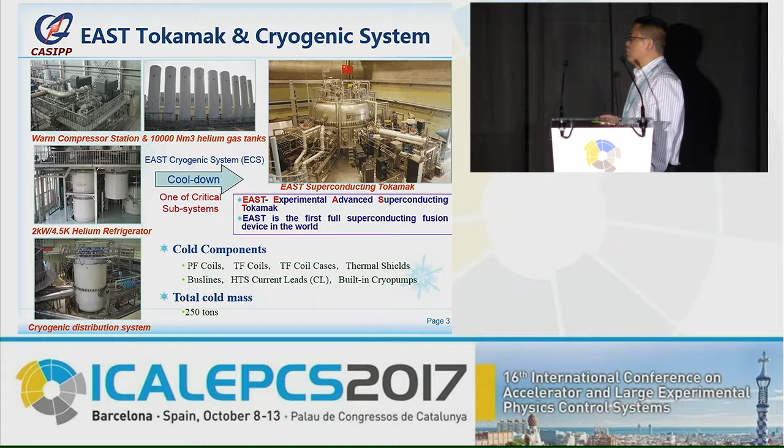Maybe you know, EAST is the Experimental Advanced Superconducting Tokamak. It is the first full superconducting fusion device in the world. So the cryogenic system is one of the critical subsystems. The cryogenics cool down the cold components, including the superconducting magnets and the support system. The total cold mass is 250 tons.

This figure shows the process of the EAST cryogenic system. The first part, the compressor stations. This part, the coldbox. This part, the cryogenic distribution system. The coldbox includes two refrigerator cycles with liquid nitrogen pre-cooling.

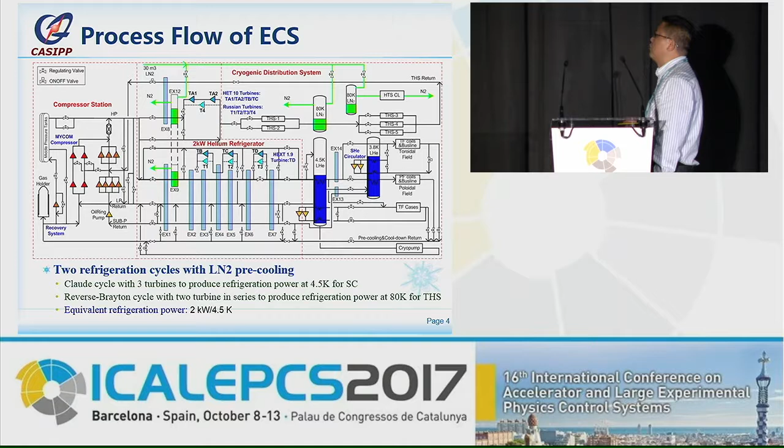The first Claude cycle with three turbines produces refrigerating power at 4.5 Kelvin for the superconducting magnets. The other, the Brayton cycle with two turbines, produces refrigerating power at 80 Kelvin for the thermal shield. The total refrigerating power is about 2 kilowatts at 4.5 Kelvin.

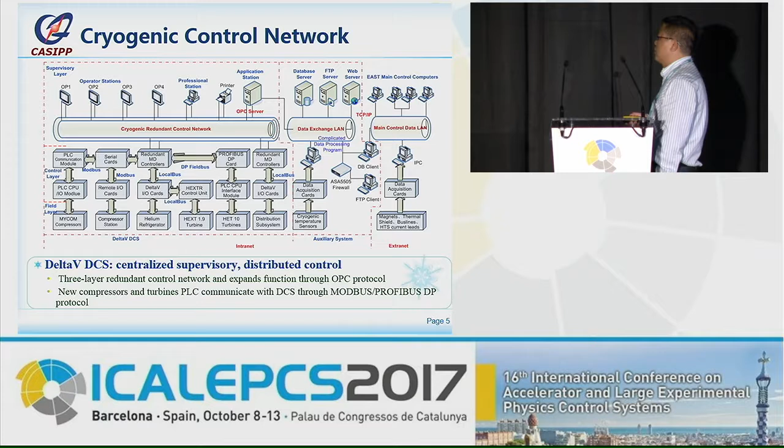This is the cryogenic control system. The control system is based on DeltaV DCS, a product of Emerson. This shows the architecture, this part, the DeltaV DCS. Now some new systems have been added. The new compressor and turbine PLC control systems are combined with the DCS through Modbus and Profibus DP protocols.

Cryogenics is very complex, and we require very high reliability and stability. So simulation is a good way to analyze the dynamic behavior. We want to use dynamic simulation for refrigeration process design, control strategy design, performance optimization, management under abnormal conditions, and system commissioning.

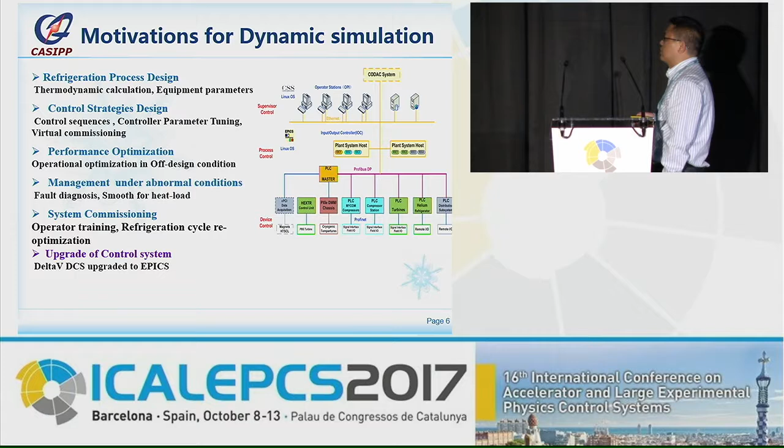Currently, we face a task. We will upgrade our control system from DeltaV DCS to an EPICS architecture. So we want to design the simulation architecture based on EPICS.

This shows the architecture. We use EcosimPro and CRYOLIB to design the process, and for the control system we base it on EPICS. The communication is by OPC. There is the OPC server in EcosimPro, and for the IOC part, we designed the IOC-OPC-Client.

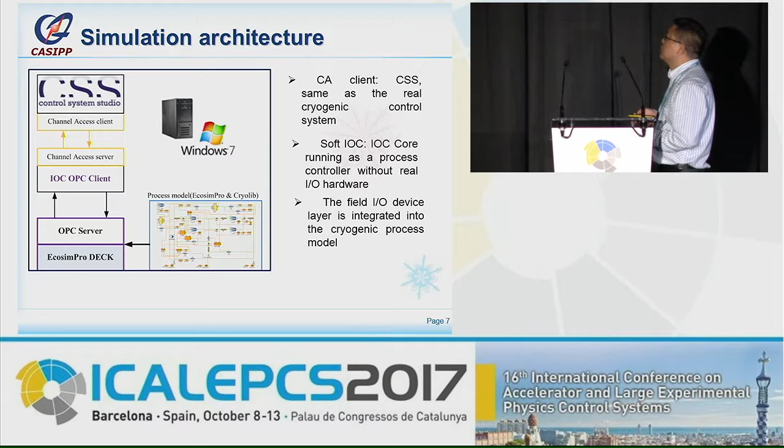EcosimPro is a modeling and simulation software, used at CERN, DESY, ASIPP, CEA, and ITER. CRYOLIB is a cryogenic library developed and validated at CERN. Now it includes all the components for the cryogenic system.

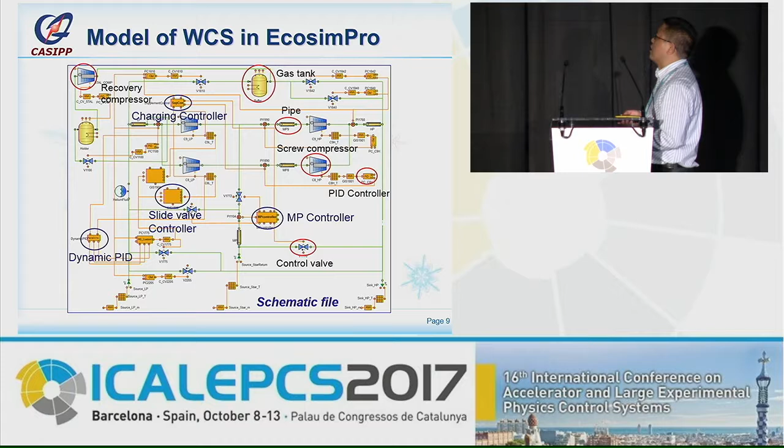This is the warm compressor station model in EcosimPro, and based on CRYOLIB we designed new modules for the control. This is the dynamic PID. This is the multi-process controller. This is the slide valve control. This is charge control. This is the model of the coldbox and the distribution system. In this part we designed a new heat exchanger module.

After creating the model, next we create an OPC server in EcosimPro. In EcosimPro, there is an OPC toolbox to create the OPC server. This shows how to create the OPC server. First, we create the deck, and then we create the OPC server.